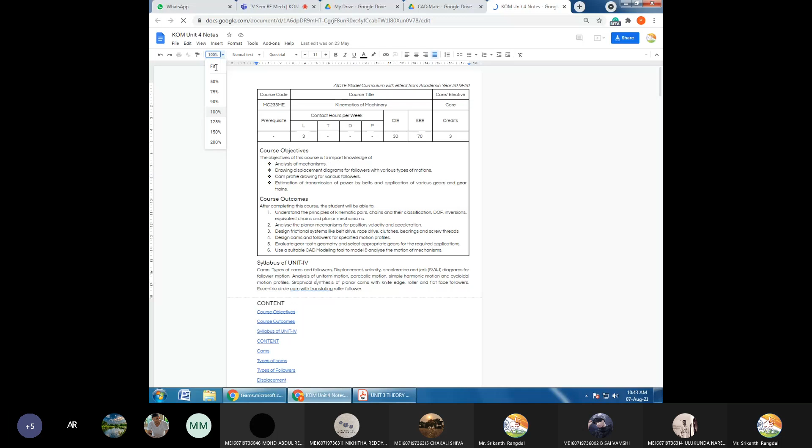So the system is slightly slower. We'll have to go with it.

So cams are devices which are used to operate valves. Valves are operated by using cams. Valves have to open at specific points. For example, the inlet valve has to exactly open when the piston is almost at the top dead center.

That too at the beginning of the suction stroke. So when the inlet valve opens, the air will be sucked in by the vacuum which is created by downward movement of the piston.

And then after the suction stroke, that valve has to close up. It should remain open while the piston is moving down.

So how is this motion obtained? Because we all know in a 4-stroke engine, there are 2 revolutions of the crankshaft, and in those 2 revolutions, the valve has to open only once. So how do they manage?

Anyone? It's another adjustment we have to do today. I'll be using Paint for explaining stuff. Okay. Ready? Oh, fine, one more problem—stylus not detected. Give me a minute.

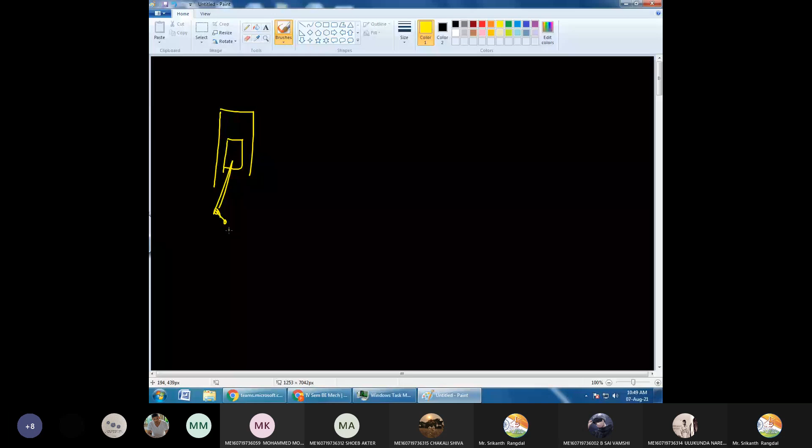So yeah, so we all know the piston keeps moving inside like this. So this one is a crankshaft. So two revolutions of the crankshaft complete one cycle, and during one cycle our valve must open only once.

Must open only once. Okay, so how is this done? How is this arrangement done? Anyone?

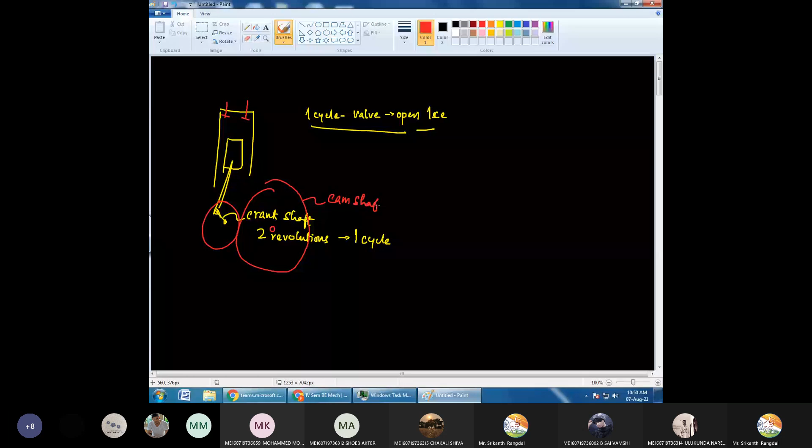By cam design. So by cam design, no? You see, cams will be located, let us say, somewhere. Actually, what we do is we use another shaft called the camshaft, and the camshaft will be double in size.

That means for two revolutions of the crankshaft, the camshaft will make only one revolution, and this camshaft is used to operate our cams. So cams are not located on the crankshaft; cams are located on the camshaft, which is different from the crankshaft, and the relation between diameters is 2 times. If the diameter of the crankshaft is d, then the diameter of the camshaft will be 2 times of d.

Okay. Anyway, this was not a discussion closely related to the subject. I was just trying to engage you while I was arranging everything else. Anyway, so let's take our studies forward.

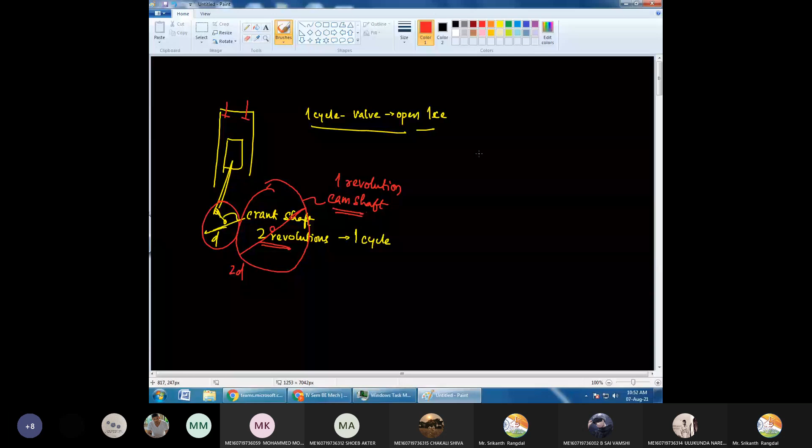So whenever we want some non-uniform kind of motion, the desired kind of motion to obtain, that is where we use the cams. Now, what do I mean by desired motion? So if you take up mechanisms, while the crank is rotating, it will move to and fro.

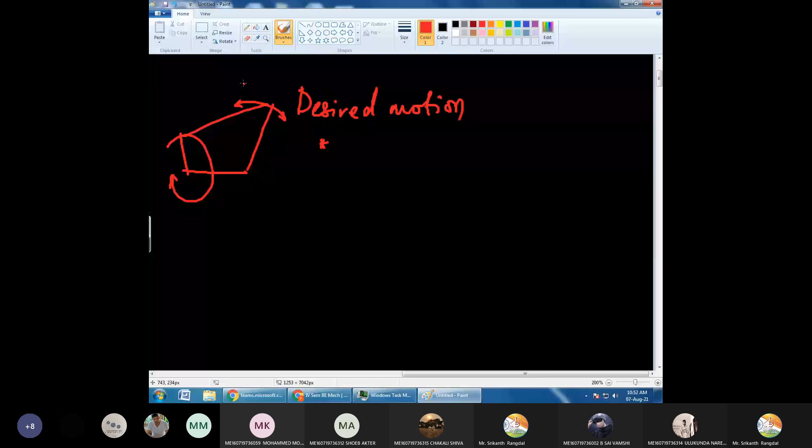Now this motion is going to be an oscillating motion. Most of the times, this will be SHM.

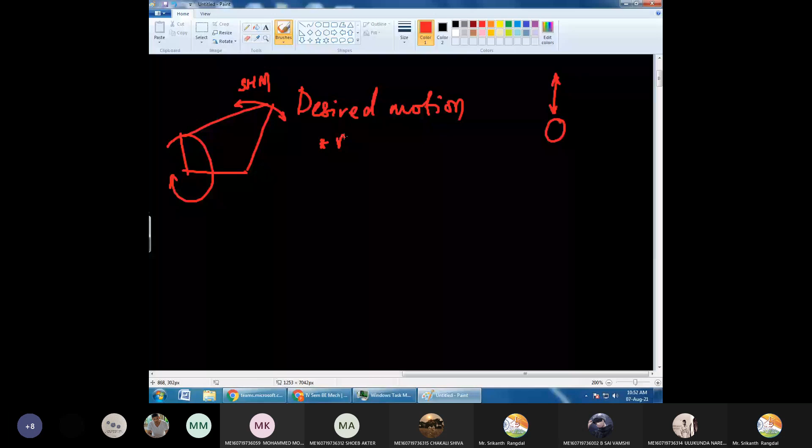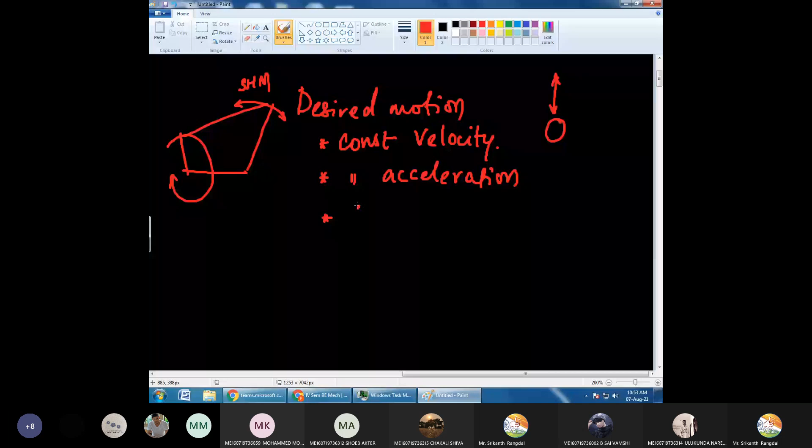But suppose we want motion which should happen with, let us say, constant velocity, or we want the motion to happen with constant acceleration, or we want it to follow SHM, that is simple harmonic motion, or if you want still better, let us say we want it to move with cycloidal motion.

So these are the different kinds of motion.

These kinds of motion are very difficult to obtain using mechanisms, and this is where cams come to our help.

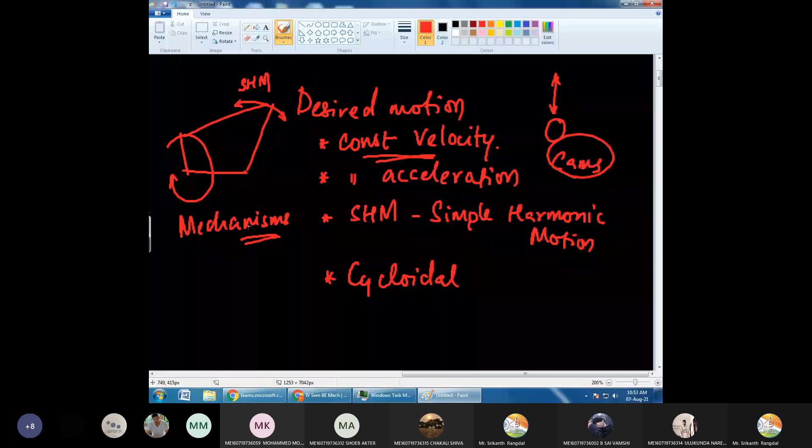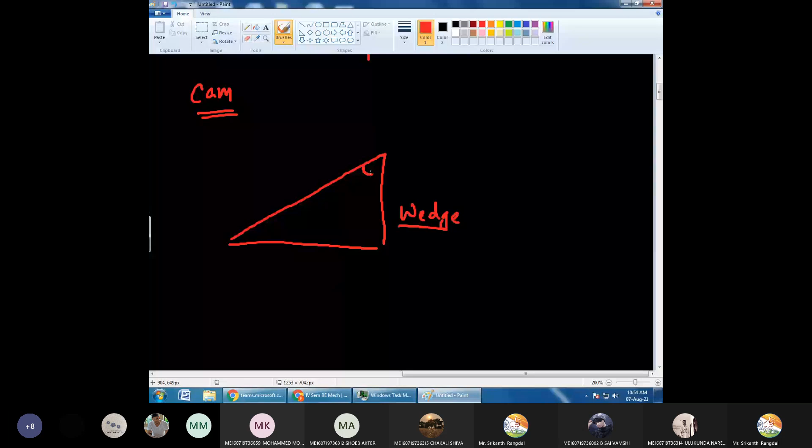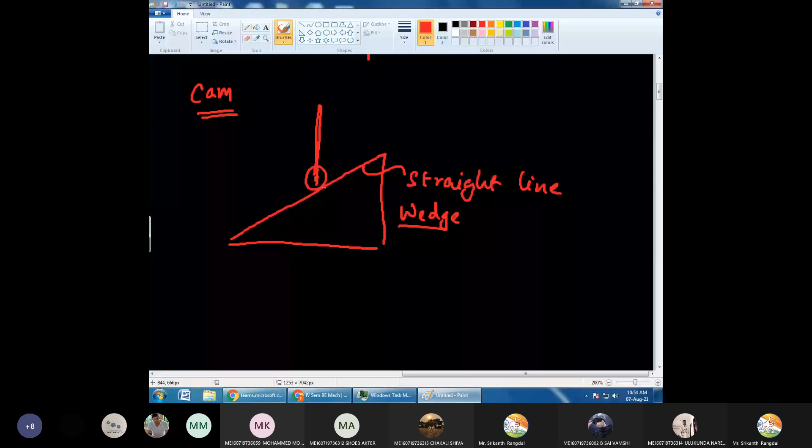So what cams do is they have a certain cross section. Let's say they have some cross section. In this case, I'm taking a simple wedge, a straight line wedge. And let's say I'm having a roller which is in contact with the wedge, and the shaft of this roller is constrained to move only in one particular direction, so the shaft can only move upward and downward.

So when the wedge moves sideways, what will happen? The cam will move up and down. Now, because this is a straight line motion, if the velocity of the wedge is v, what will be the velocity of the cam? This angle here is theta.

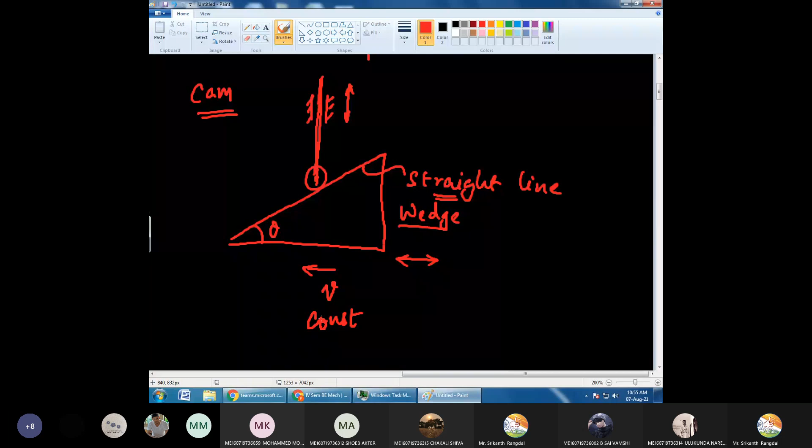If the velocity of the wedge is v, what will be the velocity of the cam? First, tell me, if the wedge is moving with constant velocity, will the velocity of the cam be constant or variable? Yes, of course, because this is a straight line, so this velocity will also be constant, but it will be in some ratio.

If the angle theta is 45 degrees, then the velocity of the wedge and the velocity of the follower will be equal. But as the angle changes, the velocity will be varying. Of course, if the wedge's velocity is constant, then this velocity will also be constant. So this wedge in this particular situation is working like a cam.

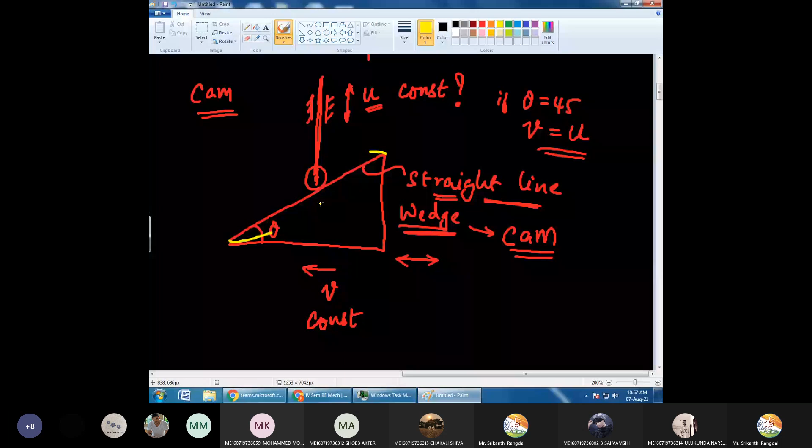So let us say instead of using a straight line, if I'm using a shape like this, then depending on the shape, I can obtain any variation in the velocity of the follower. This one is called the follower. Whatever kind of motion I want in the follower, I can obtain just by varying the cross section of this wedge. This particular wedge is called a cam.

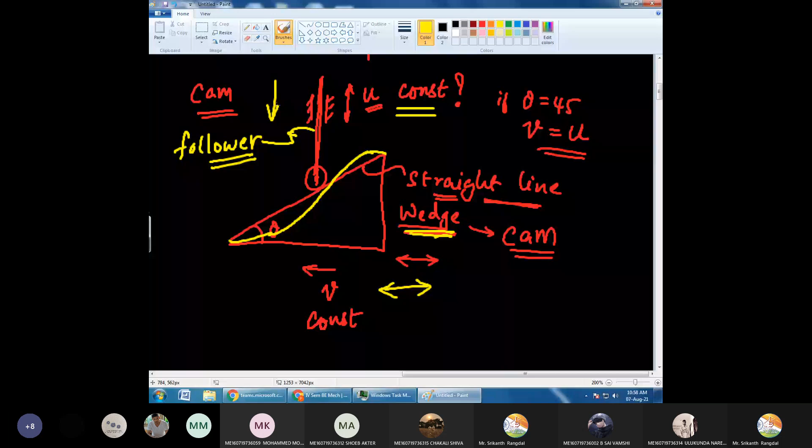Now here you can see that the wedge is moving in the horizontal direction, and the follower is moving in the vertical direction. Now this kind of motion is very rare; we will not be needing this kind of motion. So most commonly, the kind of motion that we'll need will be different.

One of the parts will be rotating, and another part, let's say, has to move up and down. This is the usual kind of motion required. The advantage with this is that because this is a revolution, we don't have to bring it back.

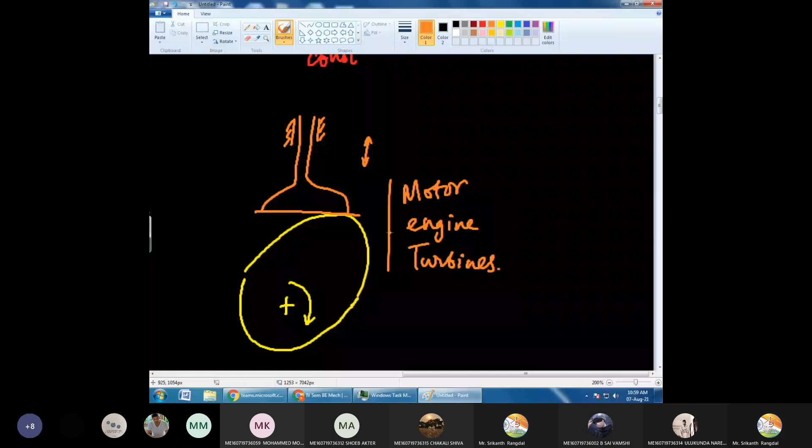Many times we can obtain the revolution motion from a lot of easily available sources, like electric motors, engines, or turbines. All these kinds of machines provide us torque in the form of rotational motion, and this rotational motion we want to use to operate our cam and follower. So this is the usual kind of motion that we'll be using.

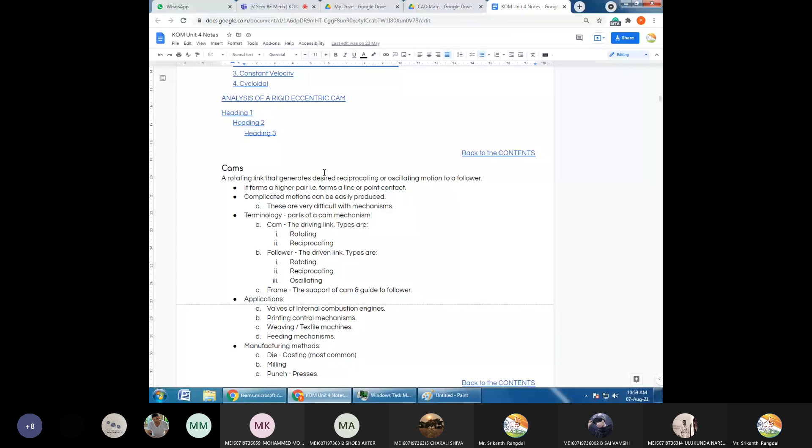Now there are various different kinds of cams available. Various different kinds of cams are available, so let us take a look at them. Okay, so this is where it all begins.

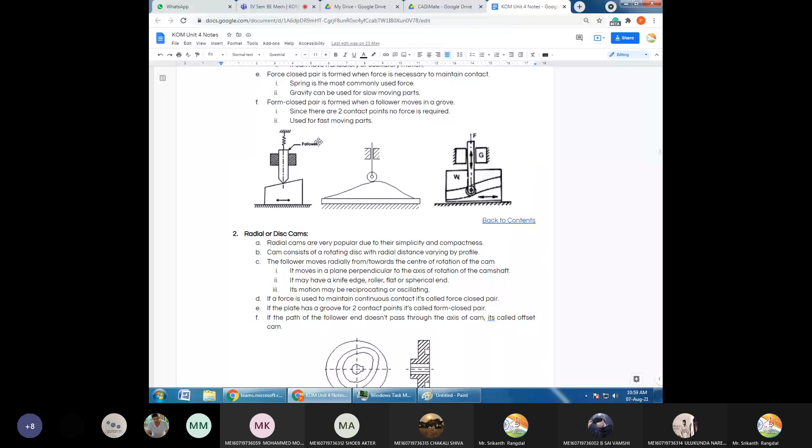So you can see this is the first kind of cam that I explained. Here we have a wedge kind of cam, and here there is another wedge shape, but the cross section is slightly different, and the kind of motion we obtain in the follower will also be different. This is again a plate kind of cam.

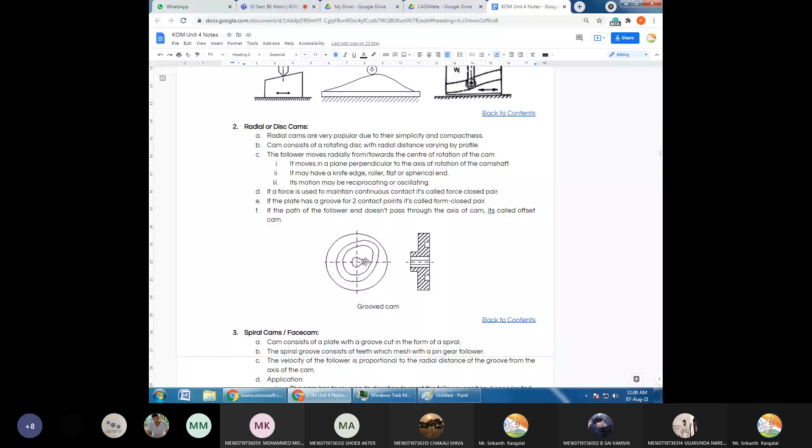Then the radial cam. I told you radial cams are more common because we get a revolute motion, which is cyclic in nature, and we can continuously operate the follower using the radial cam. And we have spiral cams. Spiral cams are like this, so we'll be putting a groove in a rotating plate, and based on the shape of this groove, we can obtain whatever kind of motion we want.

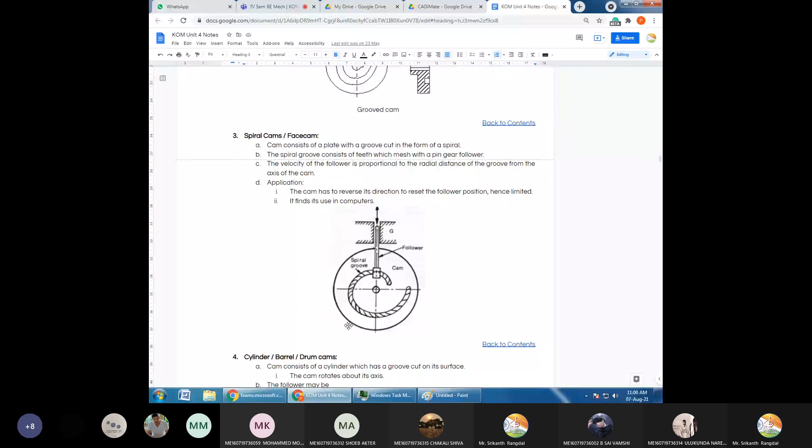Then here we have cylindrical or barrel cams. Barrel cams are like this. Of course, this cam is also revolute, but there will be a groove on the cylindrical cam. Inside that groove, we will have a roller. That roller is in turn attached with an oscillator. So this is called a cylinder cam, a barrel cam, or a drum cam.

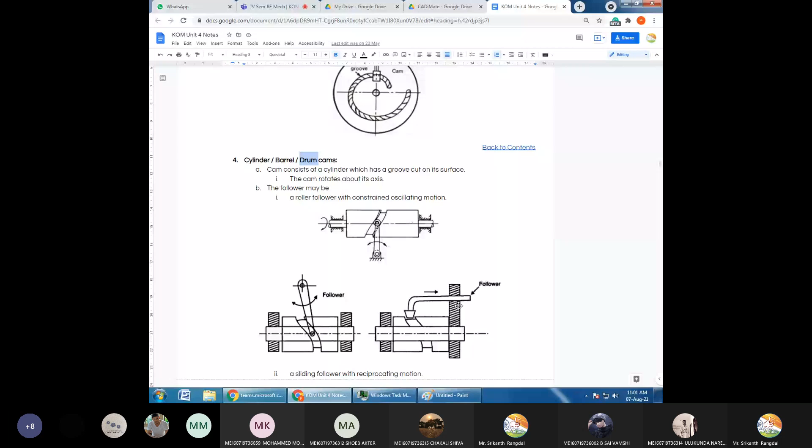So all these terms are pointing us towards the same thing. Now the follower may have an oscillating kind of motion wherein the angle is changing, or here in this case, on the right side, you can see the follower is moving to and fro, left and right. Even in the diagram below, the follower is moving left and right. So depending on what kind of motion we want, we can use this.

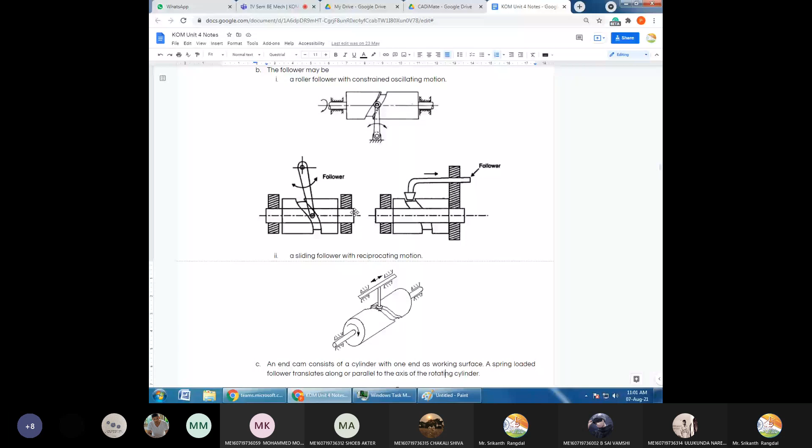Now these upper few diagrams are showing a groove. The advantage with a groove is that the follower gets completely constrained. It cannot move in any other possible direction. No other movement is possible. Whereas we can go with an open one like this. The cross section will be present on the cylindrical surface, but on the other side we will not have the constraint. So these kinds of followers and cams need to be constrained using an external force.

So we can either go with gravity. The gravity may result in the follower falling down and maintaining contact. Or if the cam is rotating very, very fast, there are chances that if the acceleration created by the cam is higher than gravity, the contact will break. In such cases, we will have to go for an external spring or some other apparatus. The spring has to constantly push our follower down to maintain the contact.

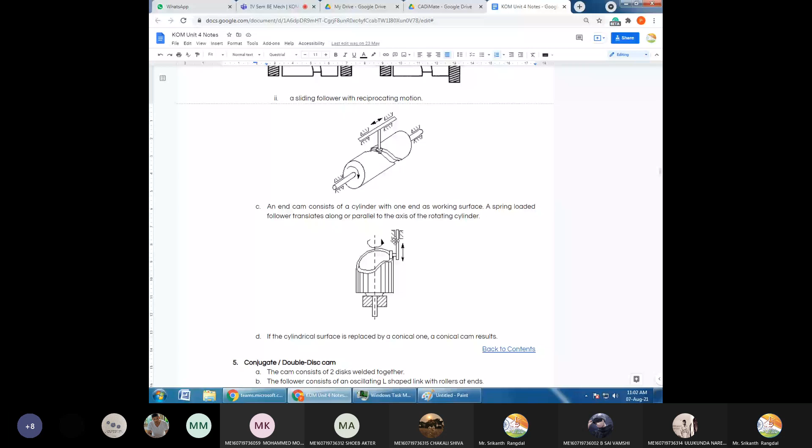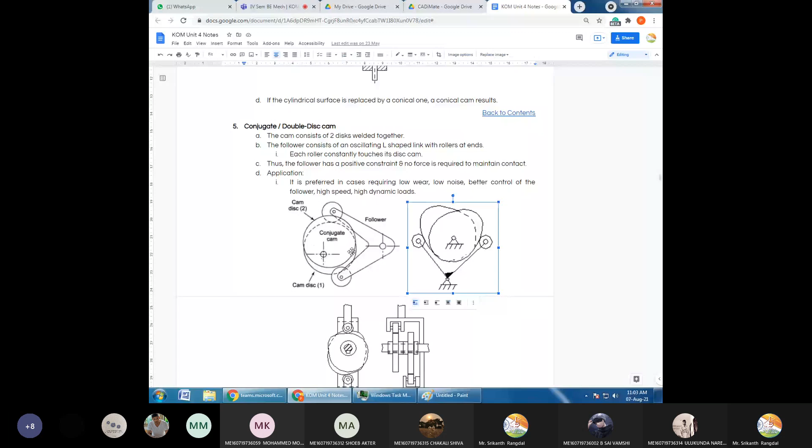So the two plates have to be conjugate, very carefully designed, because the angle of the follower cannot change. If you don't design this conjugate cam properly, there are chances the follower will break. So we have to design this very carefully. In the upper two diagrams, the follower is undergoing oscillating motion, with the angle changing. Below, the follower is moving up and down. All these are examples of conjugate or double disc cams.

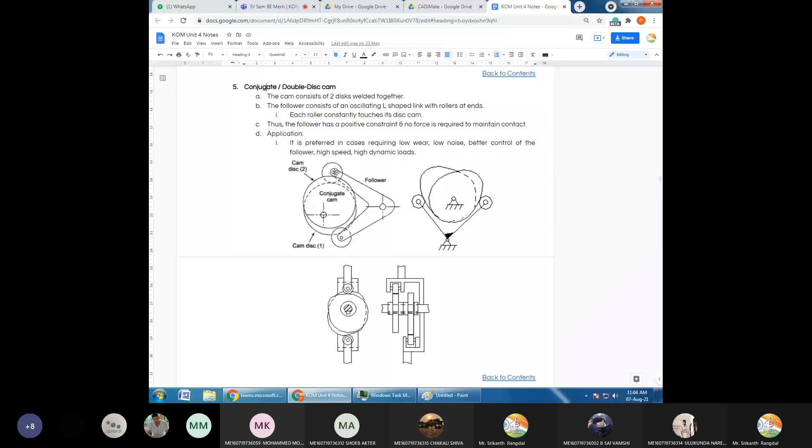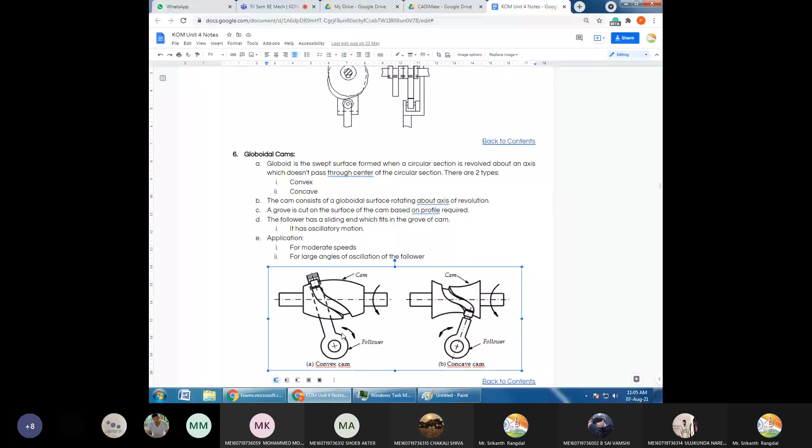So when a spring is used to constrain the links properly, what kind of joint is it? What kind of constraint is it called? You have learned this in the first chapter. Can anyone answer this?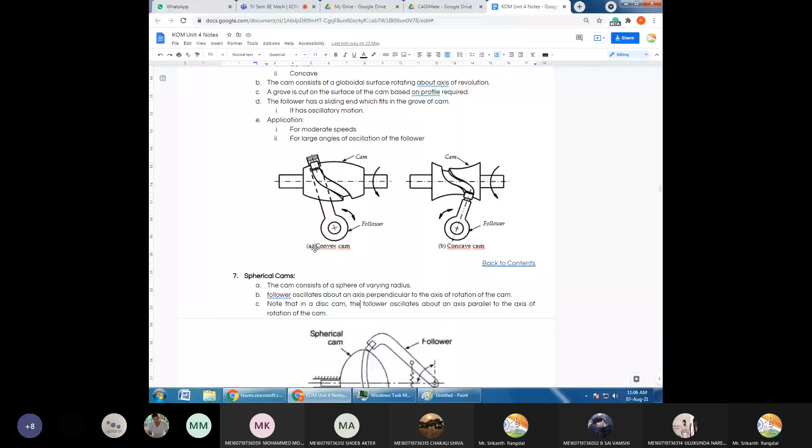Whenever you are using a spring or an external force to completely constrain the mechanism, what kind of closure is it? It is called a force closed pair or force closed joint. Sometimes it is also called a successfully constrained joint.

So these are all the different kinds of cams.

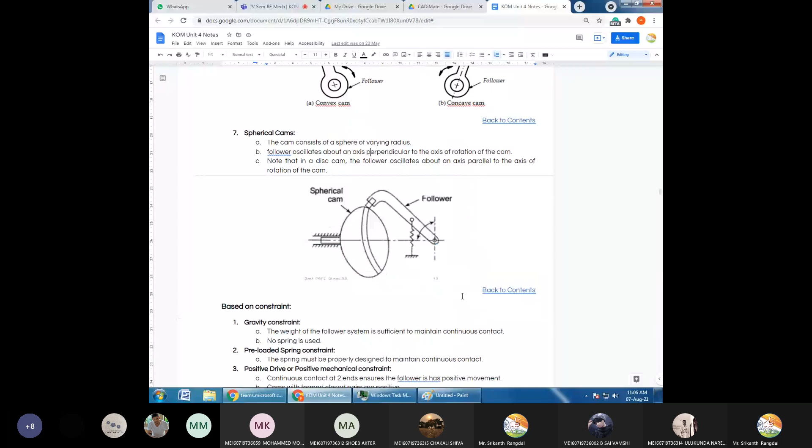So next we'll also have to study the different kinds of followers. Types of followers: there may be a knife edge follower, a roller follower, a mushroom or flat faced follower, and a spherical faced follower.

Diagrams for these I have not added. I'll just add them as and when I find them.

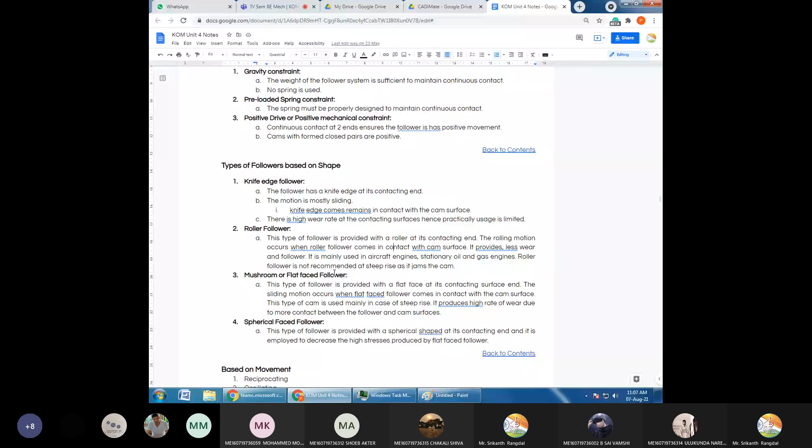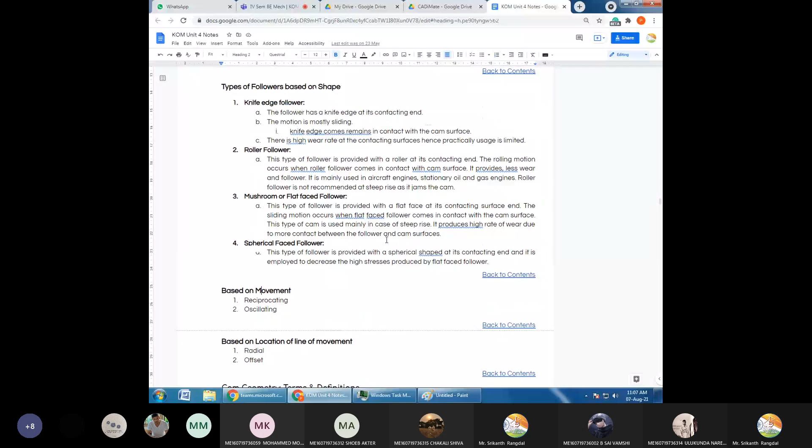Next, we should understand the terms that we'll be using with the followers.

There will be a revolving base part which controls the roller that is in contact. The part which is moving up and down is called the follower. The part which is rotating with uniform velocity or speed is called the cam. So a cam and follower together give us a mechanism.

Now the cam has to carry the profile required to create whatever kind of motion we desire to obtain. What kinds of motion exist? We have constant velocity, constant acceleration, SHM (simple harmonic motion), or cycloidal. Apart from this, if you want any other kind of motion, it is also possible for us to get.

So we just have to create the required cam profile, and with that profile manufacture or fabricate our cam and assemble this mechanism properly, and we will get that kind of motion available.

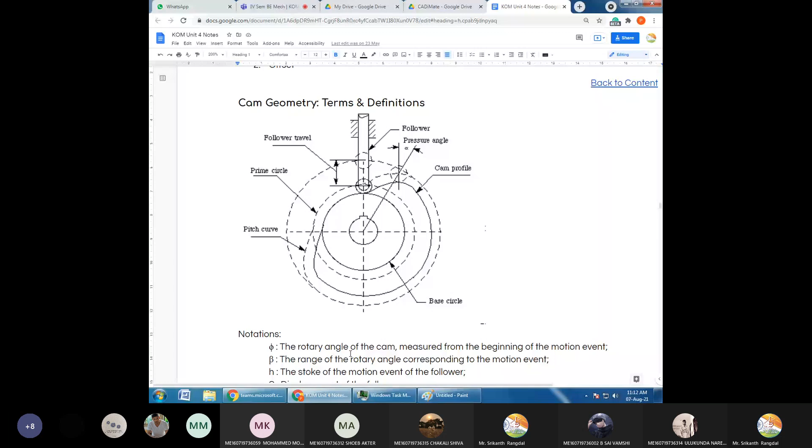Here you can see some notations given. Phi is the notation used for the rotary angle of the cam measured from the beginning of the motion event. Beta is the range of the rotary angle corresponding to the motion event. H is taken as the stroke of the motion, that is, the height or follower travel, denoted by H. Then S is the displacement of the follower from the minimum position.

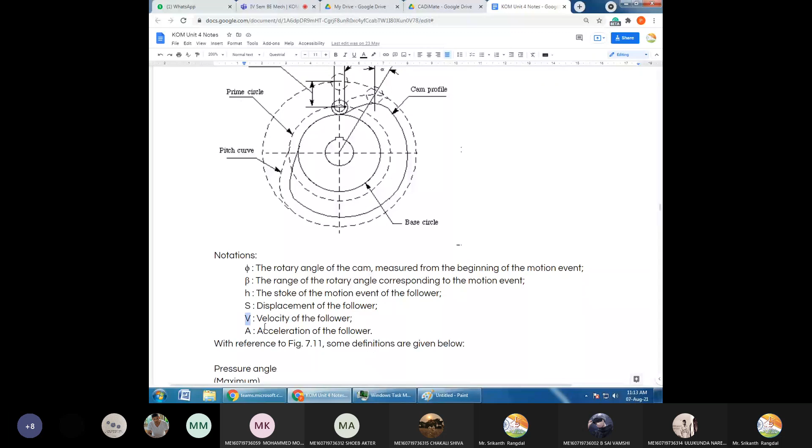At different revolutions, as the cam rotates, S is going to vary, but H is the maximum displacement undergone by the follower. Then we have V, the notation used for velocity of the follower, and A, the notation used for acceleration of the follower.

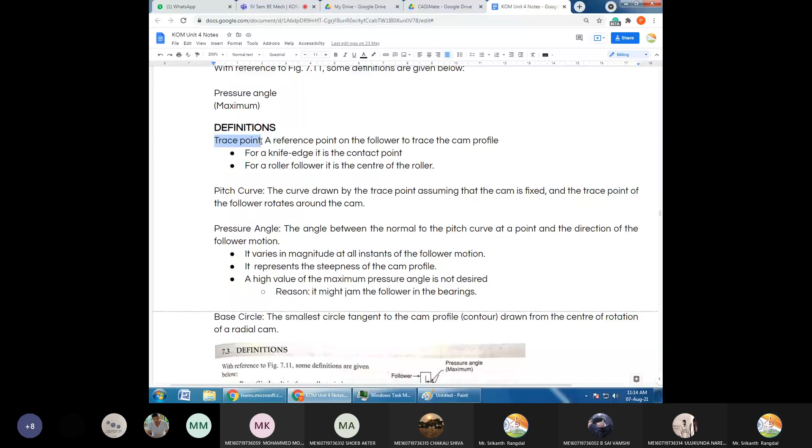So we have some definitions here. Trace point is a reference point on the follower used to trace the cam profile. The trace point should define the kind of motion we want, whether constant velocity, constant acceleration, constant jerk, constant snap, SHM, or cycloidal. So we use the trace point to get that kind of motion, and the path taken by the trace point is called the pitch curve. Using this pitch curve, we have to generate the cam profile.

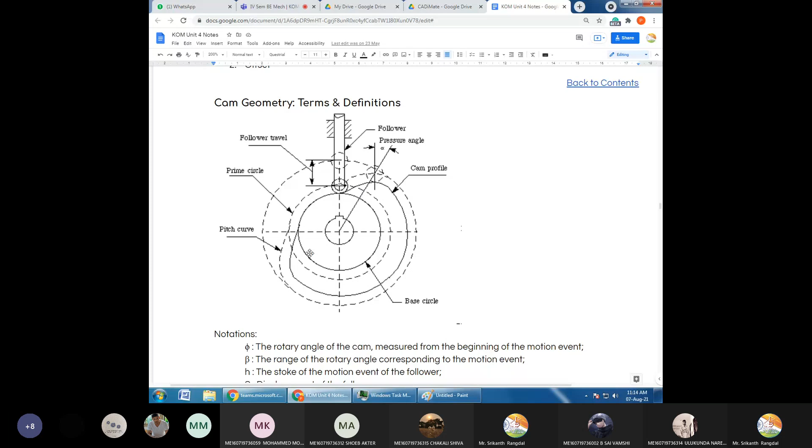That's our next definition: pitch curve, the curve drawn by the trace point, assuming that the cam is fixed. Actually the cam rotates and the follower moves, but when drawing the cam profile, we assume the cam is stationary and the follower itself moves all around it. So that is the definition of pitch curve, the curve drawn by the trace point as it revolves around the fixed cam.

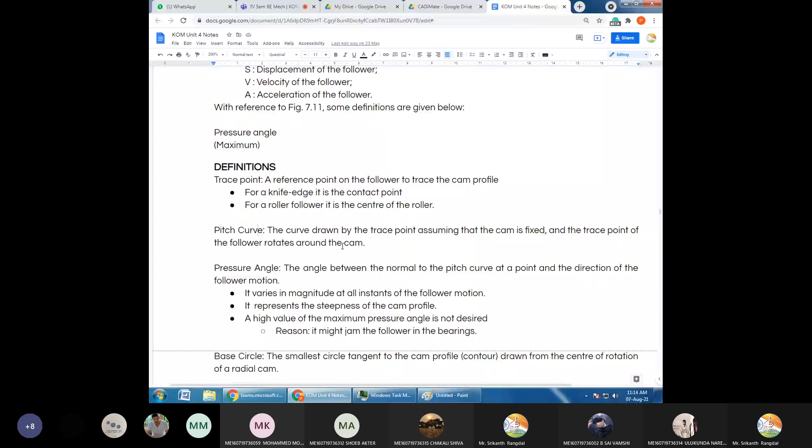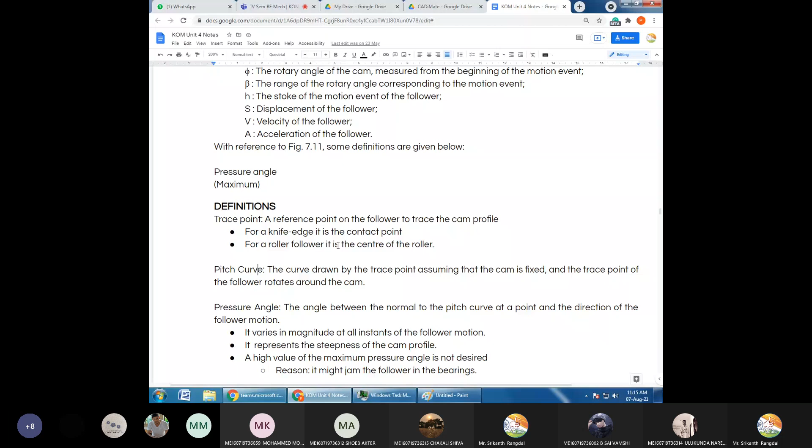In this chapter, we will also do some drawings using geometric instruments to create the cam profiles. The kind of motion required, the kind of follower, and the kind of cam will be given to us, and we will have to draw the cam profile. First we will always draw the pitch curve, and then using the pitch curve, we will obtain the profile of the cam.

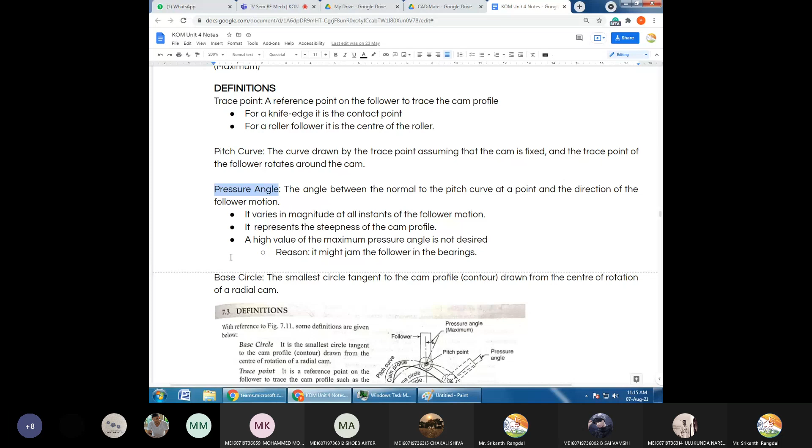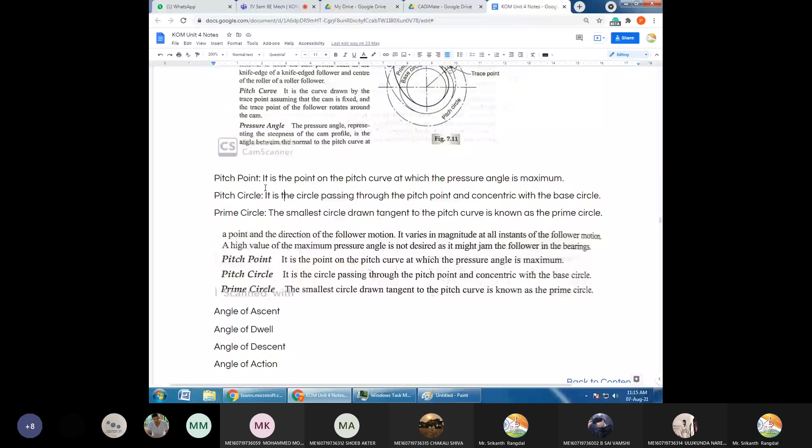Next, the pressure angle, I've already told you about it; the definition is given, and I'll share these notes with you so you can go through it. Then the base circle, the smallest circle tangent to the cam profile. Then the pitch point, a point on the pitch curve at which the pressure angle is maximum — we analyze the pressure angle at all points as the cam rotates, and the pitch point is where it is maximum. Then the pitch circle, a circle passing through the pitch point, concentric with the base circle. Then the prime circle, the smallest circle drawn tangent to the pitch curve.

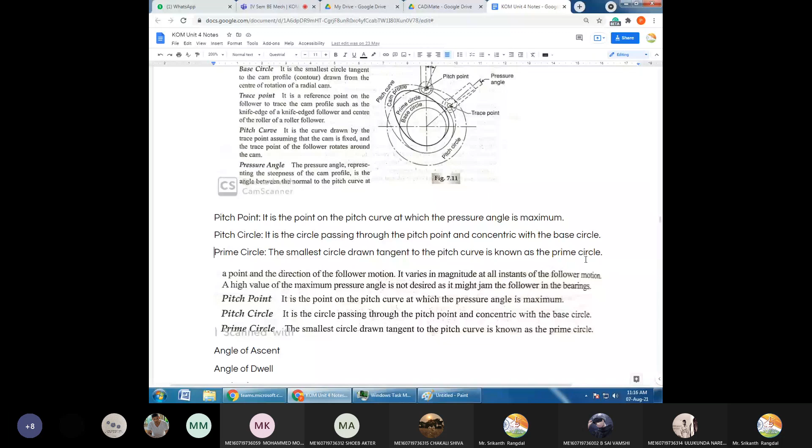Then angle of ascent, angle of dwell, angle of descent — these are very clear. Ascent means going up, so the angle of rotation of the cam for which the follower rises up is called the angle of ascent.

What is angle of dwell? It is the angle of rotation of the cam for which the follower doesn't move. The cam will be rotating, but the follower remains constant at the same position — that angle is called the angle of dwell.

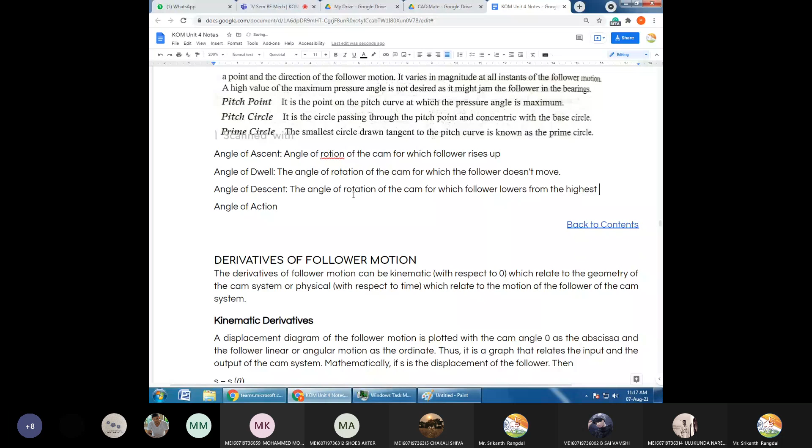And angle of descent — descent means coming down. So the angle of rotation of the cam for which the follower comes down, lowers from the highest position to the lowest position, is called the angle of descent.

Then angle of action. The angle of action is the sum of all these angles — the sum of all the above angles.

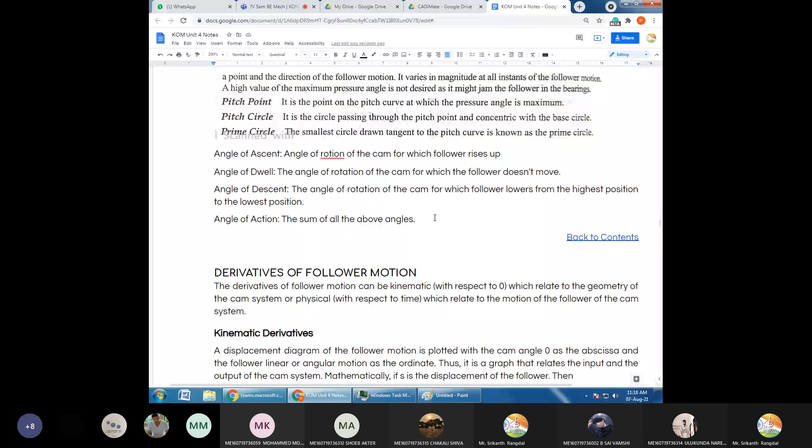Now, the angle of action does not include the angle for which the follower remains at the lowest possible position. The rotation of the cam during which the follower remains in the lowest possible position is not included here.

As soon as the follower leaves contact with the base circle, that's when we start taking the angle, and when it touches back the base circle, that is the last angle. So the sum of all these angles will give us the angle of action.

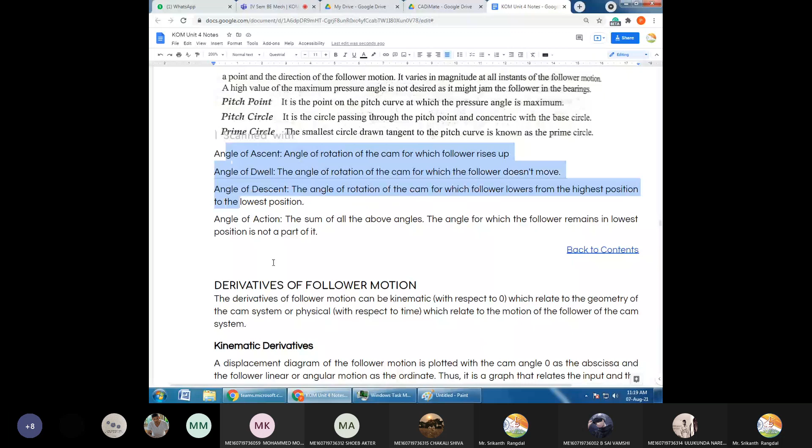Then derivatives of the follower motion. These equations will help us analyze the motion of the follower. We all know 's' — what is s? S is displacement. So when we want to analyze the displacement, we have to get a function in terms of theta. What is theta?

What is theta here? Angular displacement. Angular displacement of cam. Theta is angular displacement of cam.

Whereas, what is s? You can see it is the displacement of the follower. S is the displacement of follower.

So the first thing we have to obtain is a relation between displacement of the follower and the rotation of the cam. We have to obtain a relation between displacement of the follower and rotation of the cam. So this relation we have to obtain first.

Then when we differentiate it once, we will end up with ds by d theta. So we will end up getting what is that?

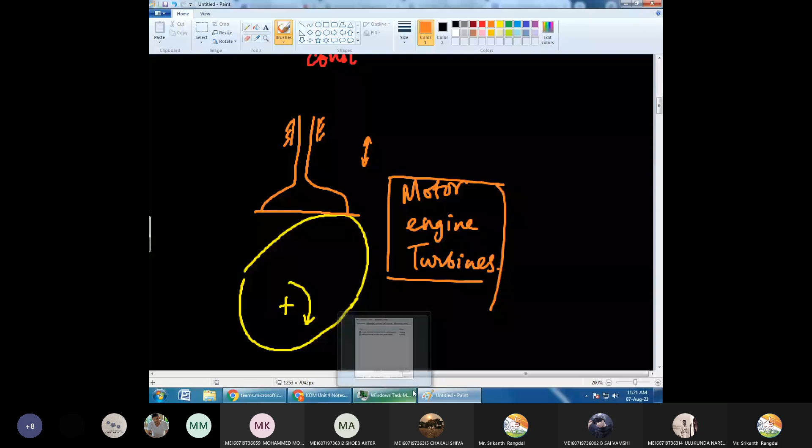Let me write it here. There are some mistakes over here. So I already told you, s we should obtain in terms of theta. S, we should obtain in terms of theta. Then when we want to find velocity,

velocity is ds by dt, isn't it? Velocity is ds by dt. So this is velocity of follower. Velocity of follower. So now we need to get this.

We need to get a relation for this velocity in terms of omega. What is omega? Omega is angular velocity of cam. So now this angular velocity of the cam will be constant. Angular velocity of the cam will be constant.

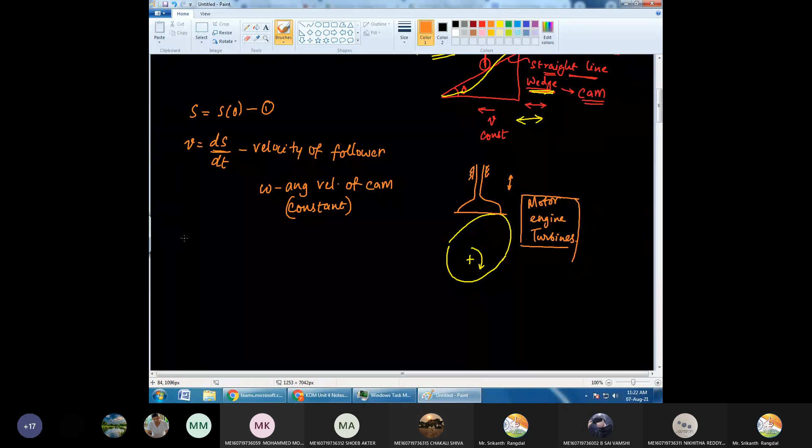So if you know the angular velocity of cam, you should be able to find the velocity of the follower. So how to get this? Let us take equation number 1 and differentiate. So differentiate equation 1 with respect to t, the time. So what do we get? We get ds by dt, and that's equal to s dash of theta.

Now here we are differentiating with respect to time, but here the variable is theta. So what we have to do here? Chain rule we have to apply. So d theta by dt we have to take, and we will get a function in terms of theta. And what is d theta by dt? Omega. D theta by dt is, of course, omega. So velocity will be equal to this. So this is how we will do analysis.

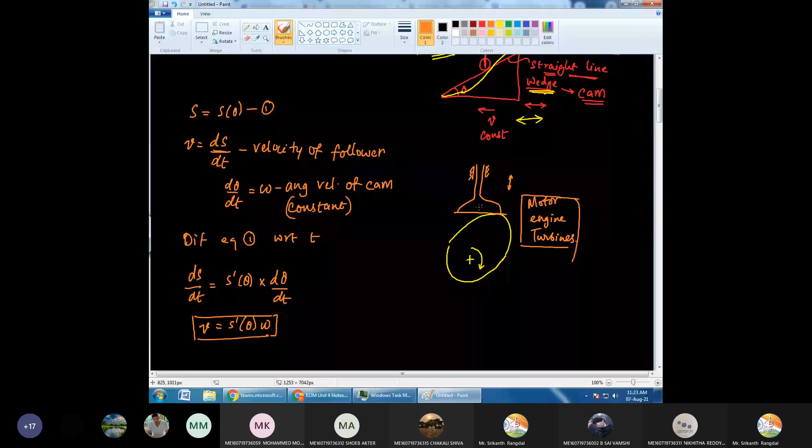Next, when we want to find acceleration, how to find acceleration? Acceleration is dv by dt. So we have to take equation number 2 and again differentiate this. We have to take equation 2 and differentiate it. So acceleration equals dv by dt. So differentiate this, we get s double dash we will get.

Before s double dash, actually omega is constant, right? So it will come out and we will get s double dash of theta. Once again we will have to take the chain rule. So we will get omega square times s double dash of theta, s double dash of theta. So this is the formula for acceleration. So you can go on to continue doing this.

What is the rate of change of acceleration? Yes, rate of change of acceleration is called jerk. So knowing the pattern, we will get omega cube and s triple dash of theta.

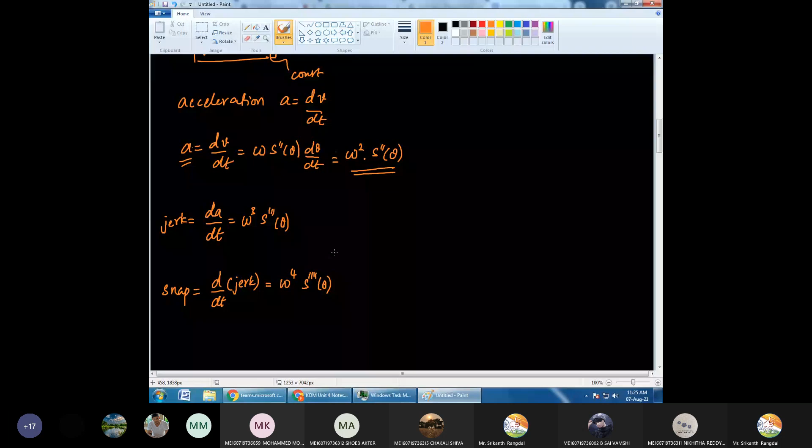And what is the rate of change of jerk? That is snap. Rate of change of jerk is snap. So from this, we will get omega power 4 and s 4 times dash of theta. So this is how we can do analysis. So if you know the velocity of the cam, we will be able to find the velocity, acceleration, jerk, and snap of the follower.

So these kind of things are there. So in the next class, we will be taking up different motions. We will take constant velocity, all these motions that I mentioned here. All these motions we will take up in next class.

So constant velocity, constant acceleration, then SHM, cycloidal. We will take all these motions and we will have to do analysis on this. So for example, in constant velocity, what will be the acceleration at the ends?

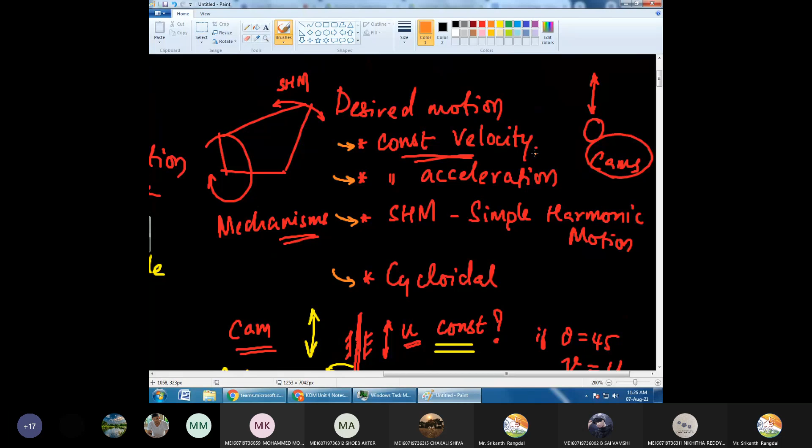If you want constant velocity, the velocity will start at 0 and then remain constant. So this is how we get the cam profile - it will consist of a straight line.

Now let's draw the velocity diagram. On the y-axis we will have velocity, and on the x-axis let us say we have theta. What will be the shape of the velocity diagram?

At the beginning, suddenly, all of a sudden, it will take the constant velocity, and then velocity will remain constant throughout the motion of the cam. And at the end, suddenly the velocity will again come back to 0.

Now let us see what happens to acceleration. Here in y-axis we are taking acceleration, how the acceleration changes, and along the x-axis we are taking theta.

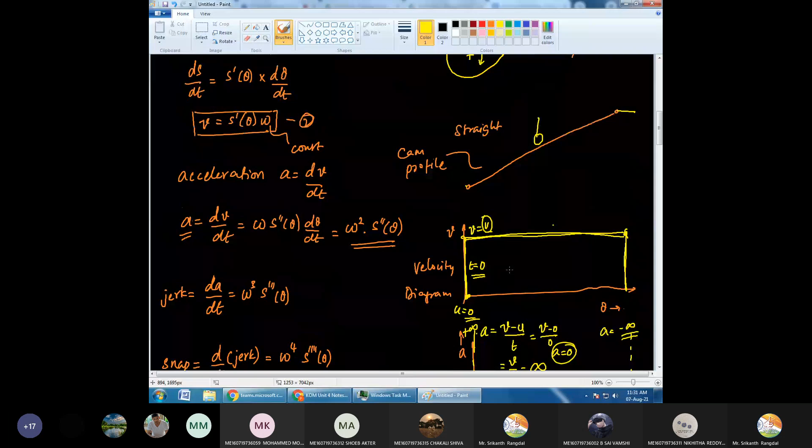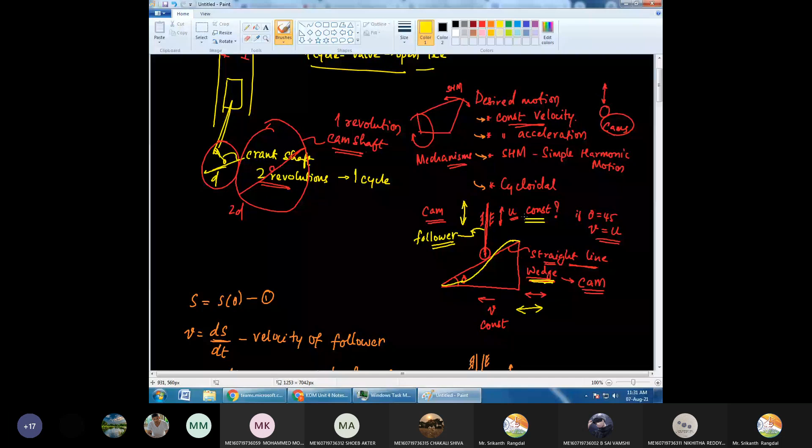So this is just one example of analysis of the motion I have taken. In the next class we will take up the other motions one by one - constant acceleration, SHM, cycloidal - and we will compare them, see which one is better, what are the problems in one kind of profile, and what are the advantages in another.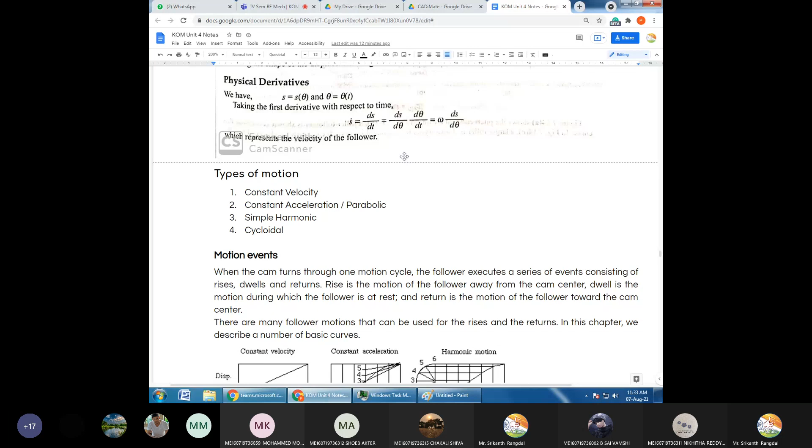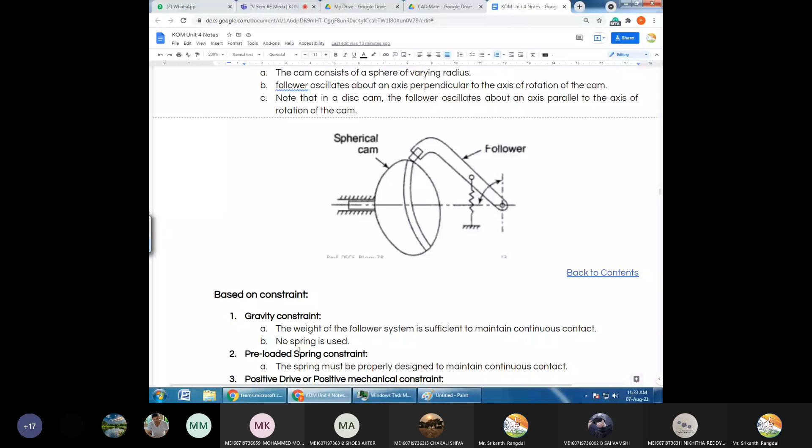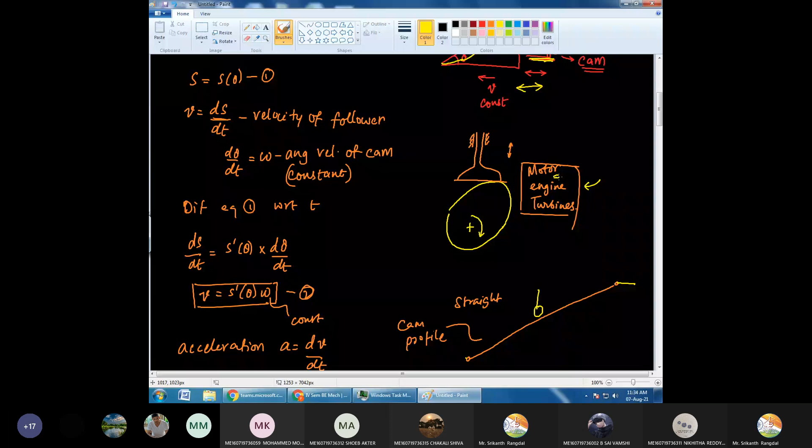CAM is operated by mechanical means. Of course it is - we need to have a source of torque, right? That's what I was telling when I mentioned motor and other stuff. So we can have an electric motor, we can have an engine using a fuel, we can have a turbine. So motion or torque from these devices is used to run the CAM.

Fine. Yes sir, yeah, yeah. Any other doubts?

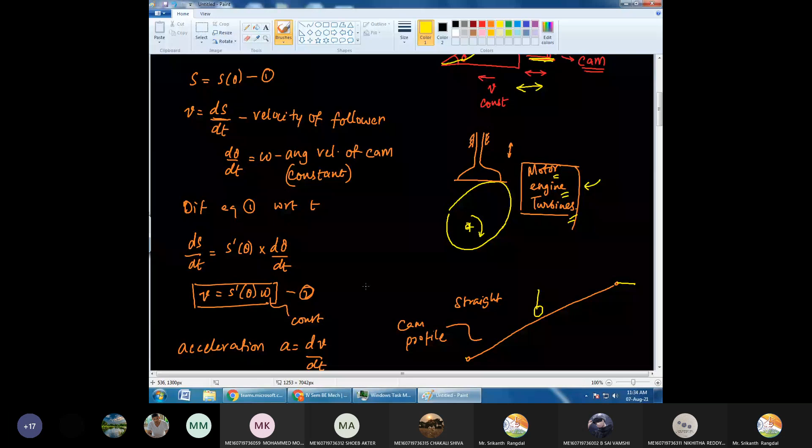If you go to our thermal lab when you visit physically, once the college reopens - maybe it's an advanced thermodynamics lab, ATD lab, or something it is called - in that lab you have the cut section, a physical model which shows the cut section. Through the cut section, you can actually see the insides.

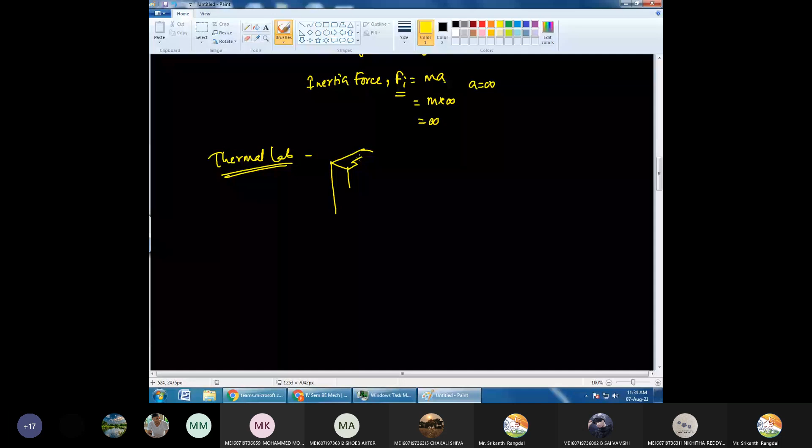If possible, I'll make a video on that and try to explain how the cams operate. The crankshaft will be separate, and with the crankshaft we'll be loading a gear, and that gear is attached to another gear called the camshaft, which will be mounted on the camshaft. If the radius of the crankshaft is r, the radius of the camshaft will be 2 times r. So when the crankshaft undergoes 2 revolutions, this one will just undergo 1 revolution. This camshaft is used for cams - on this shaft we'll be mounting our cams, and these cams, when they rotate, will open and close the valves.

If you see the physical apparatus, we will clearly understand how that operates.

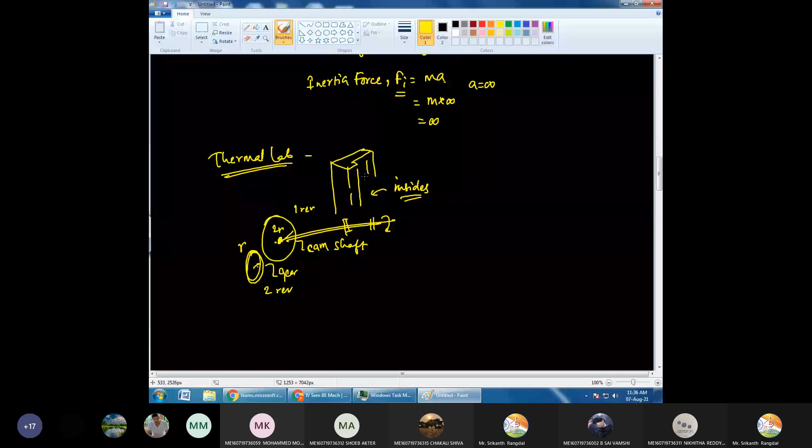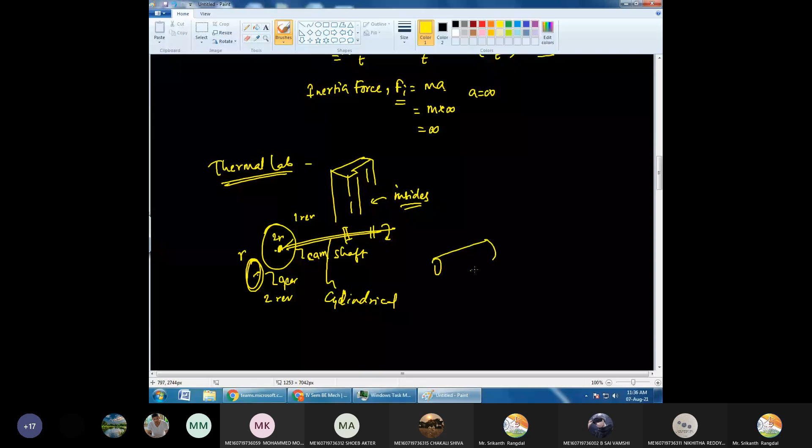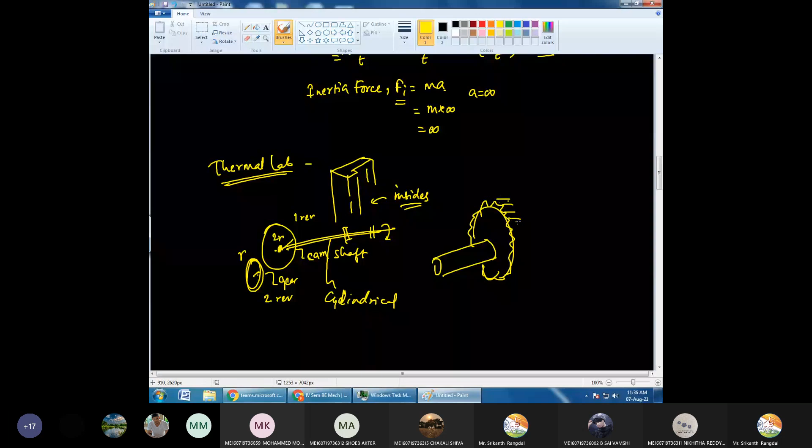Sir, does this shaft act as a gear - do they have teeth? You see, a shaft is just a cylindrical part. On the shaft, we will mount gears, and the gear will carry the teeth. So the gears are mounted on the shaft - this is the shaft, and this is a gear. The teeth will be present on the gear, not on the shaft. And our cams will be mounted here, on this.

Fine, on the same shaft. So this is one cam, let us say it is at this angle. The other cam will be at another angle. This one may be used to operate the inlet valve, and this one to operate the outlet valve. So the angle is different - you can see there is a small angle difference. When this valve closes, the other valve should open - when the outlet valve closes, that is when the inlet valve should open. And for 2 complete strokes, both the valves should remain closed. So this is how the apparatus will be.

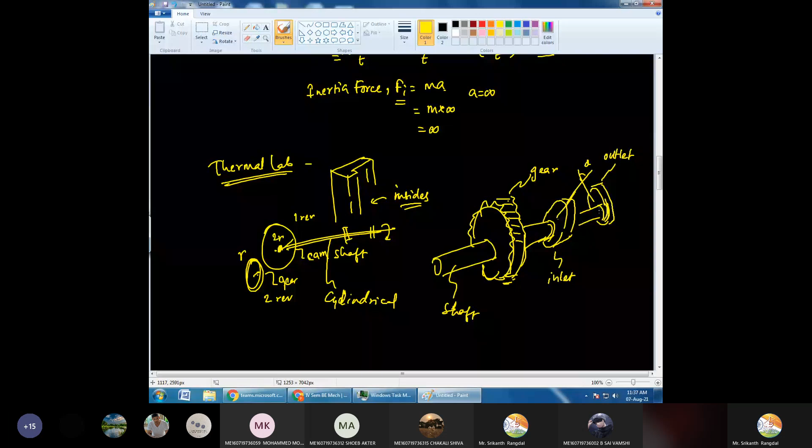So the students who are interested in making the CAD models can take up this challenge. You can use whatever software you are comfortable with - SolidWorks, Inventor, or Onshape, which has a free educational version. You just have to model this geometrically using Part Studio - model all the parts and assemble them together, such that whenever we move the crankshaft, all the other parts move automatically.

Of course, the thermal lab will be of great help to us since we have the physical model there. We can go take a look at what it looks like, and if required take some rough measurements from it to make the 3D model and assemble them properly. This will not only give you a good idea about kinematics - how the different parts are assembled, interconnected, and how they are functioning - but also good experience using CAD software to make machinery.